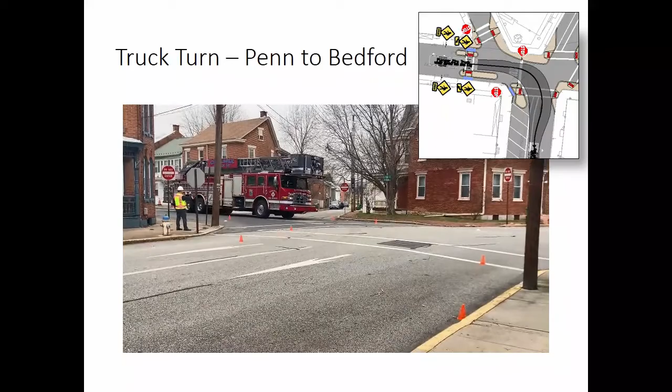We actually discovered that they did not come anywhere near the cones we had laid out, or anywhere near what we were showing in our simulation. So it was nice for us to be able to get out there and see that.

The other one we ran with them would be the left turn from Bedford onto Penn. This turn specifically is very tight because of the sharp angle of the intersection. One thing to note: our curb extension on this corner would likely be nearly, if not fully, flush with the existing pavement. It'll be more of a visual deterrent than a physical one, because it's going to be difficult for probably even a box truck to make this turn without running over it.

The other thing to note is we did actually have the ladder truck make the turn without any cones there, and in both cases he has to stop mid-turn, back up, and then continue his turn.

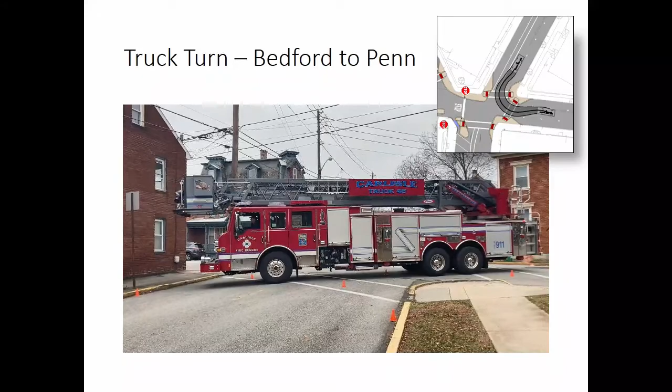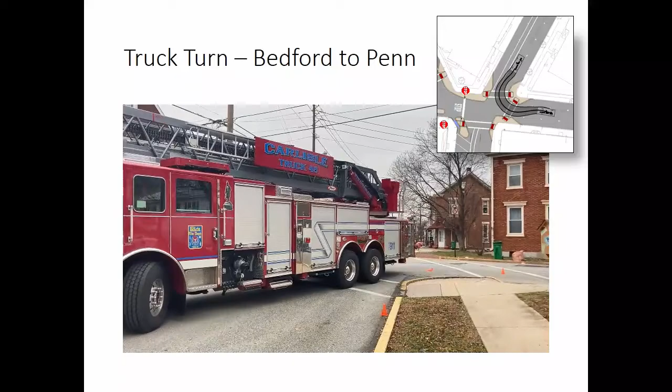So as you saw, several cones were hit, but like Danielle indicated, that curb extension will likely be flush. Talking to the driver, they might make that turn once or twice a year. So if the truck were to drive over that concrete, it would be flush, with no vertical difference there. It wouldn't be a big deal for him to just drive over that curb extension.

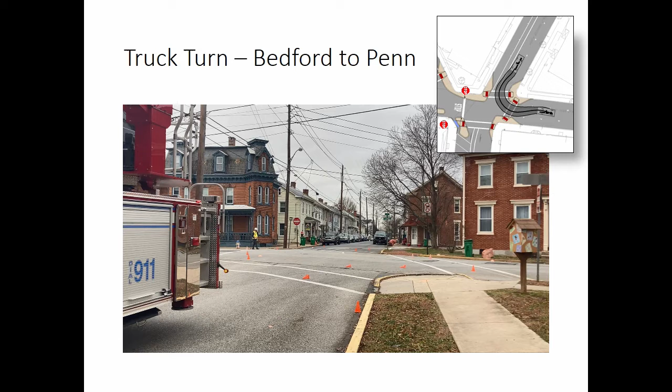Just curious, since this is a one-way, is there any reason we couldn't consider putting the bike path on the other side of Bedford? In my mind, the biggest threat scenario is a biker or someone on a scooter going south on North Bedford and somebody making a right-hand turn not seeing it. If we put all of that bike lane on the other side, continuing across Penn, is there any reason that couldn't be an option?

Normal convention is to have the bike lane to the right of traffic, and with the angle parking, if that goes forward, the bike lane also serves as a buffer for parking vehicles as well.

Coming down Bedford, you can make a left turn onto Penn. If the bike lane were on the left side of the vehicular traffic, there's more of a conflict, I would think, with cars turning left, having the bikers on the left as well.

So there's no possible right turn from Bedford onto Penn, right? That's correct. It's one way there. Everything's one way into the intersection from the west and the north, and one way away from the intersection on the south and east.

So you were saying somebody making a left-hand turn from Bedford to Penn is a scenario you'd be concerned with moving, even moving it over, since the one permitted turn at this intersection is that left turn. That makes sense. Another benefit of moving the stop bar on Penn closer to the intersection is a better sight line to see a bicycle coming on the near side of the road as well.

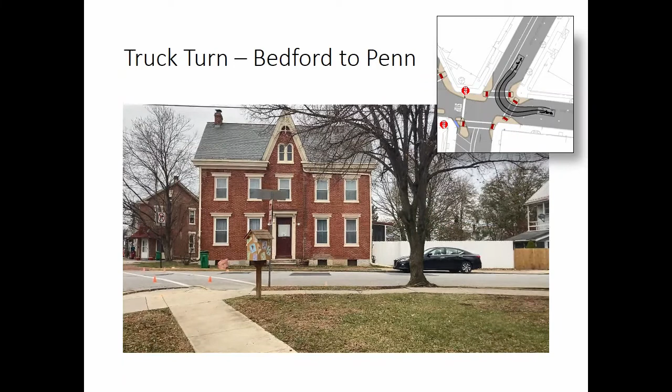Here tonight we're presenting preliminary design, looking for any feedback you have to make changes to our concept. Moving forward, we're planning to meet with the neighborhood association and get feedback from them. The overall project schedule would be to finalize plans in the spring and hopefully go to construction next summer.

Just to clarify, you'd mentioned this is phase 1 and phase 2. So this concept is just for the curb bump outs, is that correct? Like the other designs on there, the bike lane or the angle parking, those were concepts we had discussed previously, that would be separate from this. This proposal is just for the curb bump outs, and it's just showing that those other concepts could still move forward in the future if we desire to pursue that.

Is that correct? Yep, this would include the crosswalks, the new curb ramps, the signs shown here, but not the parking or the bike lanes. So this concept will work even if the borough chooses to do nothing with the revision from 2 lanes to 1, the additional bike lanes. It'll still serve to calm traffic through the intersection.

The biggest safety challenge here is as you're coming down Bedford Street, it goes from 1 lane to 2 on a skew, which, having been out there for a short period of time yesterday, cars come into the intersection and just take right off. This is going to tighten things up a little bit visually and physically, so it should serve as a gateway to the south side of Bedford Street to really help that neighborhood out safety-wise.

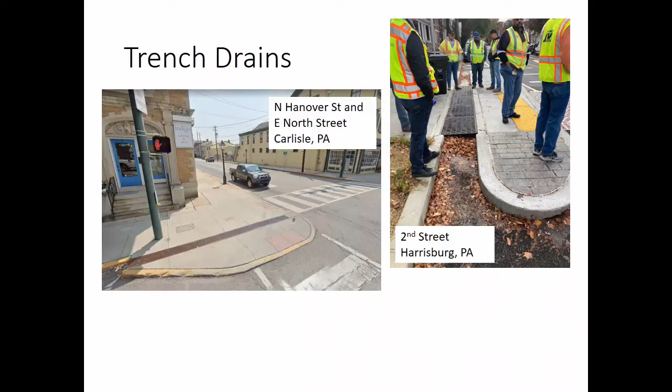Wondering that. Yeah, we thought this may come up, so we had a couple slides about back-in angle parking. PennDOT has guidelines and benefits of back-in angle parking. Really, the first movement is kind of the same as parallel parking, unless of course there's no one in front of you and you can just pull in.

But the first movement is back into the spot, and then you're pretty much in your spot and ready to go. It's definitely safer, especially with that bike lane in front of the parking. You don't have bikers getting doored, you have sight distance to see bikers coming as you pull out. It also has other safety benefits, like when vehicles open their doors and children are getting out, they'd have to go through the door to walk into the street, whereas they're directed straight back to the sidewalk. It's easier for unloading your trunk, and overall visibility is generally better with back-in parking.

Awesome, thank you. Just to clarify, is that PennDOT's preferred method for new projects, back-in versus parallel, or did they not have a position on it? Not really a position. This was from a study done in District 6 for Pottstown a while back.

FHWA does have a publication about bike lanes and on-street parking and how they work together, and one of their recommended treatments is reverse angle parking. I haven't seen anywhere that specifically recommends one over the other, but when you talk about parallel parking, virtually across the board they like to see buffered bike lanes so you avoid that conflict with doors.

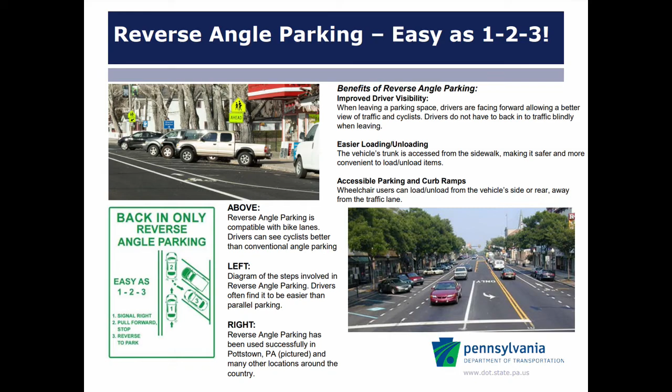Awesome, thanks. I have seen reverse angle parking elsewhere, but not in conjunction with a bike lane. My only comment is that there are a lot of very large vehicles out there today, so sometimes they creep into the road. So I think having a bike lane, or at least the line of it, to show where the parking stops, and maybe using some gentle reminders to ensure you're in there.

I actually saw one of our parking enforcement folks go into the Hamilton the other day to have someone come out who was parked in our bike lane. So it's that education of like, no, that's what that lane is. But I think having clearly marked parking spots will help. There are some people who just have larger vehicles, and we see it in commercial parking lots where it'll say these are for compact cars only or something like that. But as long as we work with the neighbors to educate them on staying in the spot, I think that'd be helpful.

Just one more example: downtown Hershey has back-in angle parking right in their main downtown. Any other questions, comments? Go ahead.

Just another observation I thought was interesting to share is the limited visibility motorists have at this intersection. Living here, I've noticed a number of vehicles will stop at the intersection, even though there's no stop sign, if they're traveling south on Bedford and approaching Penn. A number of motorists stop there, even with no stop sign, just because there's difficulty seeing and navigating the intersection.

That's near the Speedway, and I think there's a car dealer or auto parts store there, that floods frequently. Also, Lincoln Street and North Pitt Street, north of the railroad tracks. The railroad tracks are at a higher elevation and essentially act as a dam, and that floods frequently.

The third area is the Walnut Bottom Road intersection, from the 5-point intersection of Walnut Bottom, Willow, and West south to Belvedere Street. The fourth primary flooding location is at East High Street and Spring Garden Street intersection.

In addition to that, they also identified the Media Road, Gobin Drive area as a flood area. You recall a couple years ago we met in this room with residents of that area, which primarily flooded not from surface flooding but more from high groundwater levels, groundwater backing up into their basements. That was also identified as a primary high priority area.